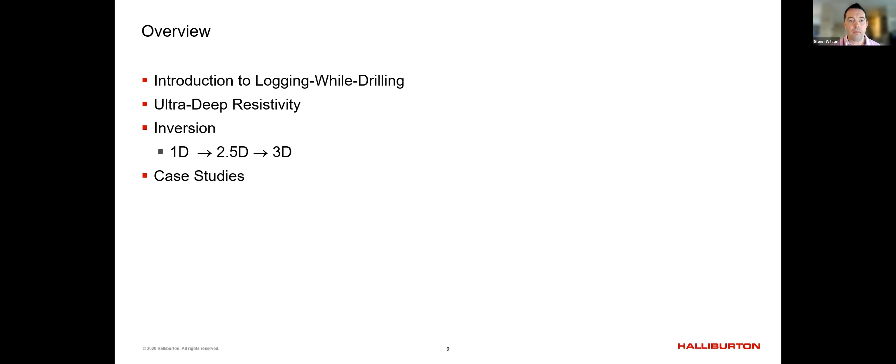So first of all, just a few acknowledgements. Within Halliburton, within the Sperry Drilling organization, for permission and support of this as a product and a technology, and to our colleagues from computational geoscience, and also to our partners, the operators and their partners, for permission to publish the case studies as well.

So a little bit about logging while drilling, just to put it in context for everybody. Logging while drilling is where, as it sounds, we're actually performing formation evaluation measurements while we're in the process of drilling a well. This cartoon here is trying to show a fully laden bottom hole assembly, or BHA. But all these tools are interchangeable, and it depends on the well and the objectives we're trying to achieve. At the very end you've got the bit where you drill. Behind that, you start having the variety of formation evaluation measurements. You'll have gamma ray measurements, not least for depthing, but also being able to look at lithologies.

We have directional sensors, because these wells that we drill are not just vertical wells. They can be deviated to lateral. So understanding where we are in the world is very important, so we have navigation components there. Resistivity is what we're going to talk of today, but that's one measurement we perform during a logging while drilling operation. Our primary reason for doing resistivity measurements is to look at fluid saturations and porosities.

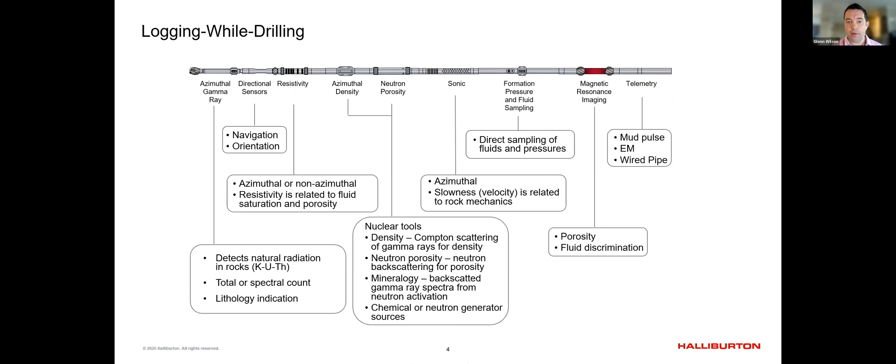But obviously we're drilling a well, and this well is inches, basically inches in diameter. And so obviously we're at significantly sub-seismic resolution. And so there's a real importance here to be able to use these logging while drilling measurements to build upon or improve our reservoir and formation understanding at a sub-seismic scale.

So this is one of the reasons that we start talking of the ultra deep resistivities and the like, or deep to ultra deep, because we're actually able to image away from the wellbore at distances less than what the seismic is giving us in terms of resolution.

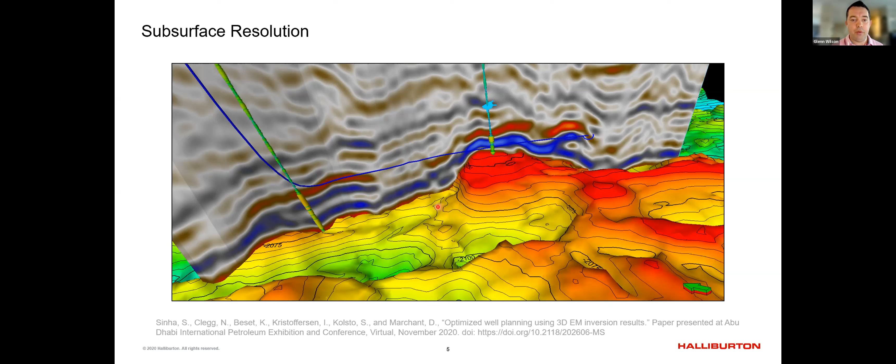If we're picking a 500-foot section of well, and we're drilling at a rate of 120 feet an hour, then obviously that's going to take us 5 hours to drill. However, we need to be making decisions quite quickly as to where this well is going to be placed, because the well path needs to be quite smooth, because ultimately we have to run completions and other tools in this well afterwards.

So we're having to make decisions early on. So in this particular example, we would need to be making decisions in the first 30 minutes as to what we're going to be doing for the next couple of hours. So as you can imagine, time is of the essence. We're not able to just be collecting data, taking it back to surface, waiting a couple of days, weeks, or the like to do some sort of analysis. We're not going to have any impact on the drilling operation if that's the case.

So there's a real big drive here to make sure that all analysis is actually performed in real time. And this is the basis of our geosteering operations that Nigel supports, and we'll speak to more in the case study.

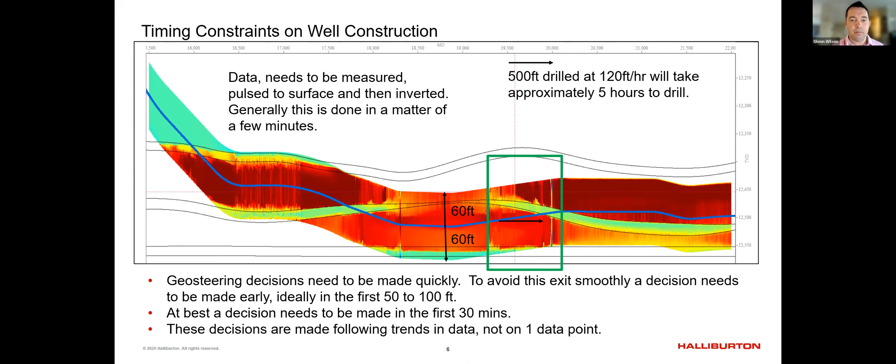So a little bit about how do we measure resistivity. There's a variety of tools to measure resistivity in LWD strings. The original solution is basically a series of coaxial antennas, effectively coils wound around the collar, and what we end up doing is not measuring the absolute field, but looking at relative differences.

So the challenge, however, when drilling in a geosteering operation is that with a coaxial configuration, you don't have azimuthal sensitivity. So whether you're approaching a bed boundary above you or a bed boundary below you, the response is the same. And so it is giving information about resistivity, yes, but it's not giving you information to help influence the geosteering operation. Should you steer back down? Should you steer back up?

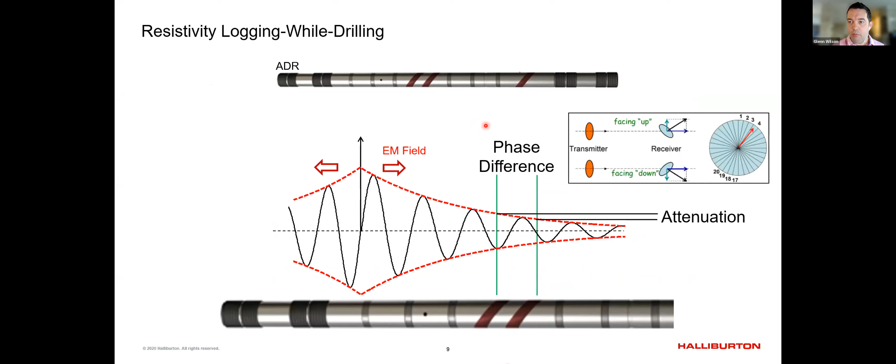And so this led, about 15 years ago or so, to the development of the azimuthal resistivity tools. Here's an example of what we refer to as the azimuthal deep resistivity tool, or ADR. What we have done is the receiver coils are now tilted. And so, as you can imagine, as the tool begins to rotate, we're able to have azimuthal sensitivity. The tool has more sensitivity to one side than it does to the other. Otherwise we're recording the same amplitude and phase difference between those receivers.

And so the benefit of the ADR is that, as we approach a bed boundary, we're now able to determine on what side the boundary is: is the boundary above us, is the boundary below us. And this has been used successfully for years now to influence geosteering operations.

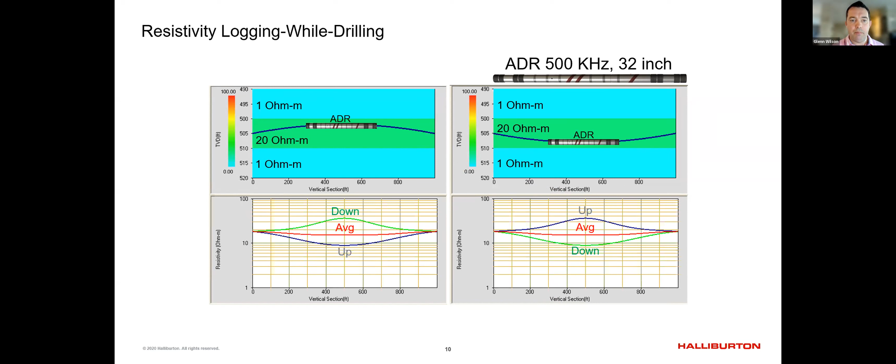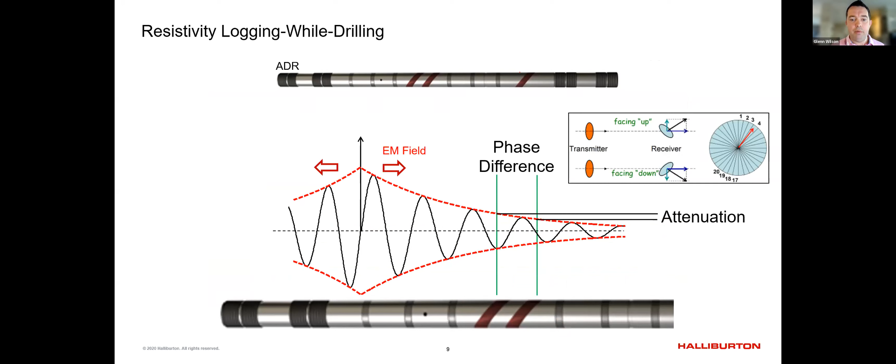Again, the depth of investigation is determined by the spacings of the transmitters and the receivers. For the shorter spacings and high frequencies commonly used, the depth of investigation can be on the order of tens of feet. However, when we want to look further in some geosteering operations, we have to space out the transmitters and receivers and change the frequencies. And so that is what we've also progressed to, what we call ultradeep resistivity.

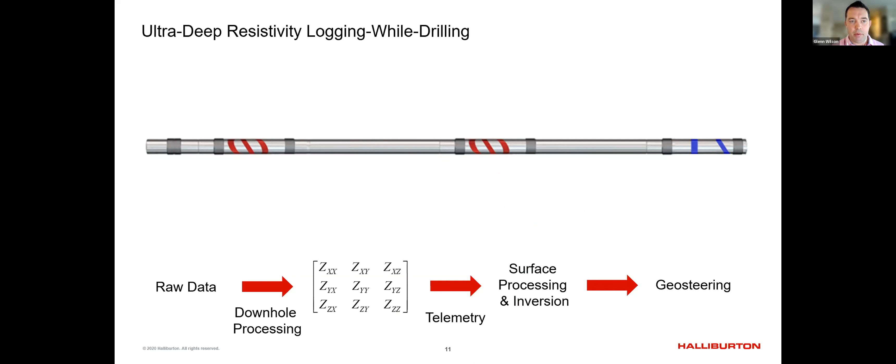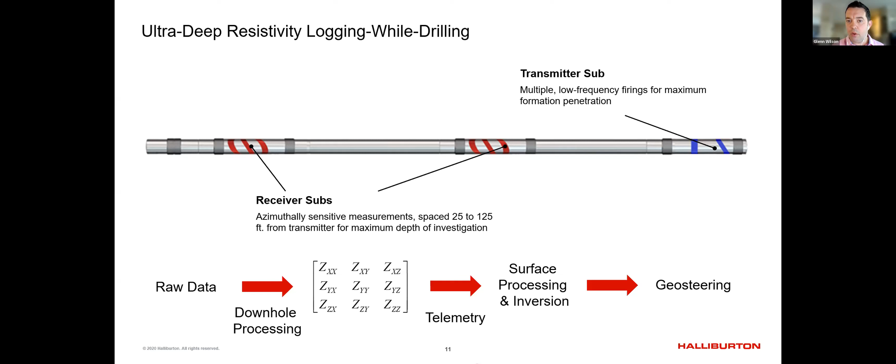This is where we begin with a transmitter sub, and by sub we mean it's a dedicated tool length. Whereas previously, the ADR and the EWR, those tools are all on the same drill collar. With ultra deep resistivity, the transmitters are on one collar, and we put receivers on different collars. So now we can space them out with, for example, other logging while drilling tools, or other spacers. So now we have flexibility as to the distance from which we want to image.

Now in terms of processing, we're putting current through one, we're recording voltages on the receivers, we're taking that raw data and doing downhole processing to calculate impedances, and then we're telemetering those to surface. We're doing additional surface processing. This is where we do our inversion, and then those answer products are fed into the geosteering operation.

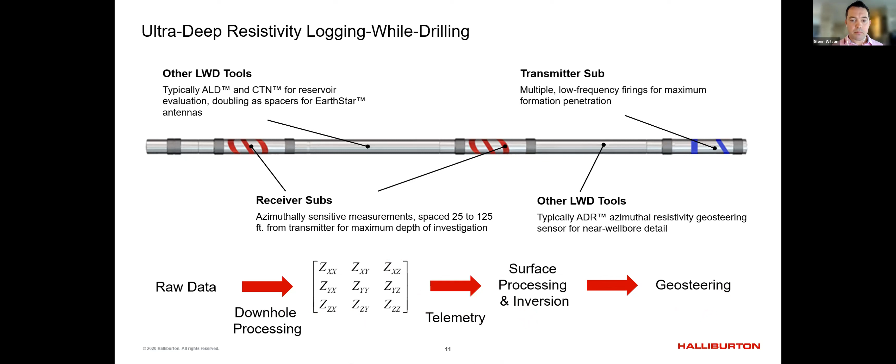So we're going to spend more time talking about the inversion side of this, and how this is used in practice. To this community, it shouldn't be a surprise, but we'll discuss the progress of inversion dimensionality from 1D all the way up to full 3D. In 1D inversions, we're assuming a layered Earth model, where the formation only varies in one direction. In these cases, we assume that it varies above and below the wellbore.

Because we're dealing with controlled sources, we have the ability to go to a 2.5D inversion, so a 3D source and a 2D geology with infinite strike. This can be along the well trajectory, or it can be across the well trajectory. But then you've got the full 3D, which gives you the maximum ability to have changes in all directions and capture the most geological complexity.

So we're going to talk about this progression, but in the art of electromagnetic inversion, there have always been discussions around progressing. This has been the same for airborne electromagnetics. It's been the same even for MT, progressing from 1D all the way to 3D.

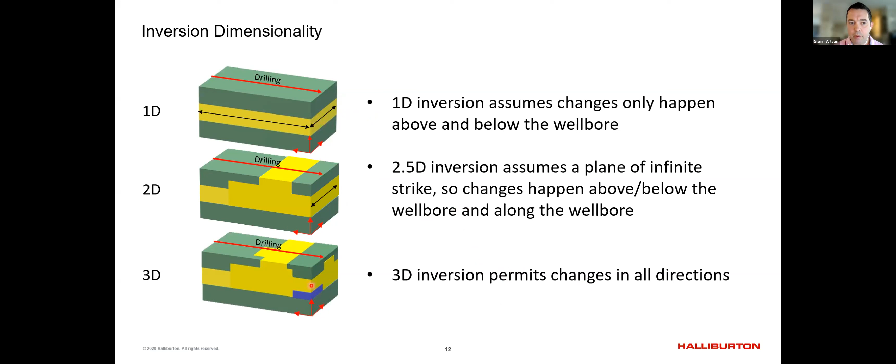And so here are examples of what the 1D inversion would look like. This is actually a pre-drill model showing you the multiple layers included in it. We can calculate all of those responses, what the tool is expected to measure, and then we can go about inverting those. Again, in the context of 1D inversion, there are any number of ways to frame this.

Over-parameterized, you can have it deterministic, you can have it stochastic. There are pros and cons. There's an abundance of literature describing these sorts of solutions. This is one example that we, as Halliburton, published back in 2018, kind of just for the ultra-deep resistivity.

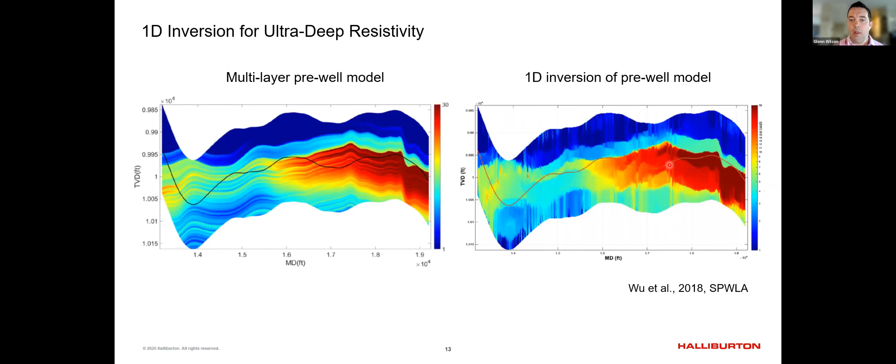Again, just kind of showing that you have a much finer resolution in your model, but then of course you're solving this for a smaller number of layers. But it gives you an idea of the sort of structure that you're trying to recover. And these 1D inversions have actually been validated, and this is again from the same publication with Mark Wu that was presented at the SPWLA back in 2018, and this is a really interesting case study.

So this gave us confidence that the tool we've developed was able to have sensitivity in this case out to over 200 feet from the wellbore, because the two inversions were able to resolve the same feature at the same true depths.

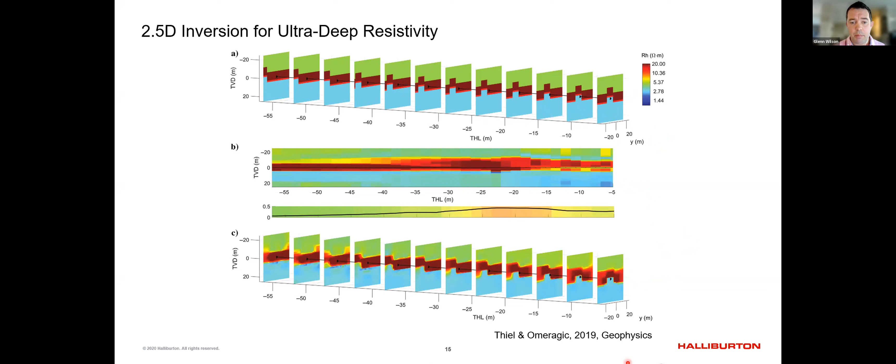So this is an example of some 2.5D inversions which have been published. The idea here is that with 2.5D, you're dealing with controlled sources. You're assuming that the formation has infinite strike in one direction, and then you're letting the other two dimensions vary. 2.5D has been published for controlled source methods for the better part of 25 years now, so this should be well known to this particular community. But obviously, we want to try and progress to the full 3D.

Normally for these sorts of grids we're going to iterative solvers, so you don't gain a lot from source to source. But it's that usual challenge, right? The discretization, the fact that we're dealing with very fine cells around the wellbore, going to very coarse cells away from it, implies that we're dealing with huge numbers of cells in the model. And so it becomes intractable to expect we can use one grid for both modeling and inversion.

Within the community, this has been identified for quite a while. Going back, for example, Commer and Newman did this sort of decoupling for marine controlled source EM basically 15 years ago. It's also been applied to airborne electromagnetics. You're able to take your global mesh, and for a given transmitter position, you define a local mesh, and then you can superimpose those. And if you've got multiple sources, each one of those can have its own local mesh.

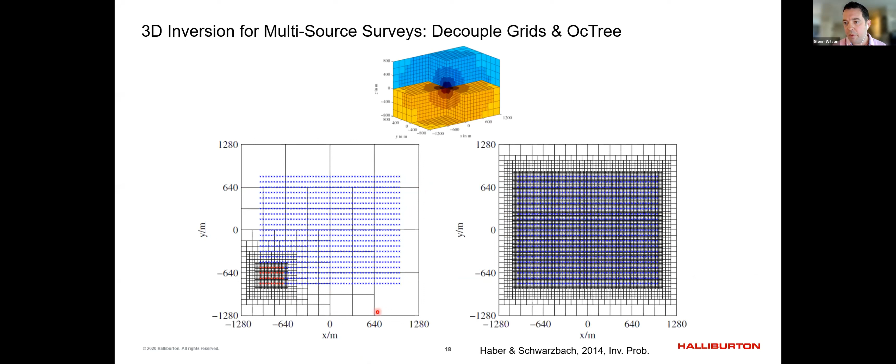But then this is basically running around the entire global grid. And so we're able to leverage this concept, particularly for logging while drilling. This is what really enables us to progress to a real-time type of solution, because we're collapsing the number of unknowns in that model down significantly.

Another point here as well is, as we go about doing inversion on LWD, we're continually collecting data. During a standard inversion, you may be trying to do inversions with all the data which you've collected. In logging while drilling, once we've drilled past something and it's beyond the sensitivity of where the drill bit is, there's not a lot of sense in maintaining that data in the inversion.

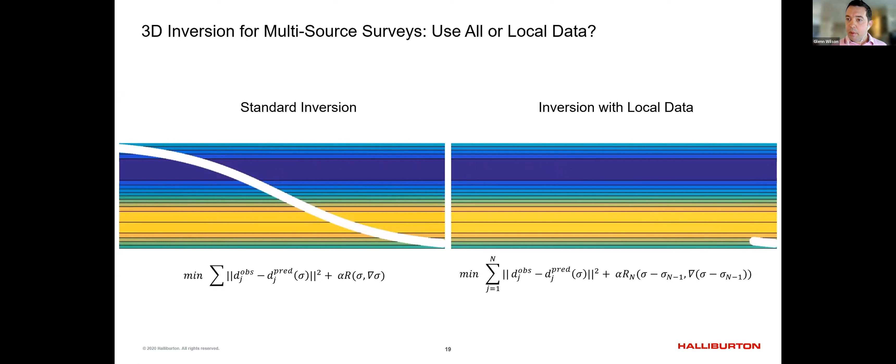So as a result, we end up doing inversion with basically local data. This has been practiced for drilling or wireline applications, called a moving window. The idea is that you've got a set of data which you continually move along the wellbore. So we end up practicing this, and it limits the amount of data we have to invert for.

So again, looking at an LWD example, the grid on the left here is what the global grid would be, and the grid on the right is what we would need to be solving for a given transmitter-receiver pair. The point being that as we progress the drilling operation, that grid is able to dynamically change and then map itself back into the global grid.

But this is where we come to the point. Often over literally the last 15 plus years, we end up with this challenge. First of all, it was: 3D inversion is not possible, it takes too much time. Now we rub up against: real-time 3D inversion is impossible. And so this is really to dismiss that.

If we compare solutions, a 1D model can have in the order of about 30,000 degrees of freedom. A 2.5D inversion, given that you're discretizing in 2 dimensions plus the spatial frequency domain, can typically end up with over 100,000 degrees of freedom. With the OcTree mesh and the ability to limit the volume of sensitivity, we're able to get this down to the order of 30 to 50,000 cells per model. This means we're able to solve this in literally seconds, compared to standard grids with huge numbers of cells taking hours to days.

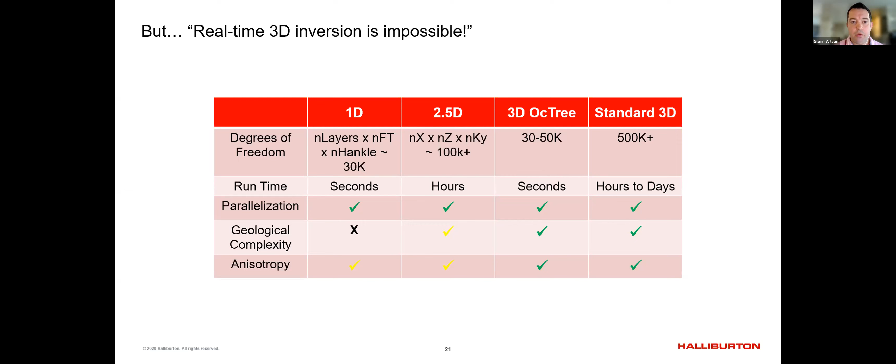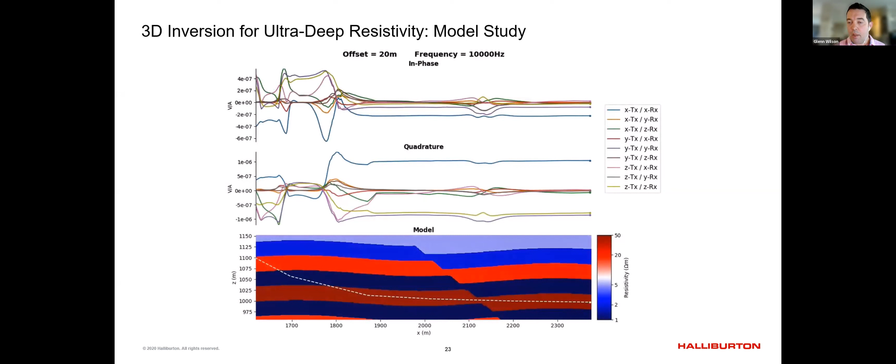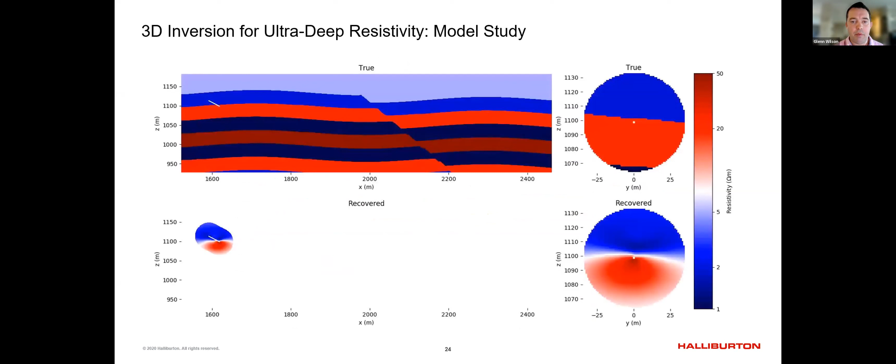So in terms of inversion, what you're going to see here is the top is the actual true model. How do we compare to reality? The bottom is what we're going to see with that inversion of that local data as the BHA moves through the formation. And then the images on the right here are going to be basically gun barrel views down the well. And so you're able to see the formation azimuth be captured as well.

And so as I play this, it's basically simulating that logging while drilling operation, in that you're able to see around and slightly ahead of the BHA. And so obviously as shown here, it's not just capturing the formation in the plane of the well trajectory, but we're actually capturing the azimuths around the wellbore very well.

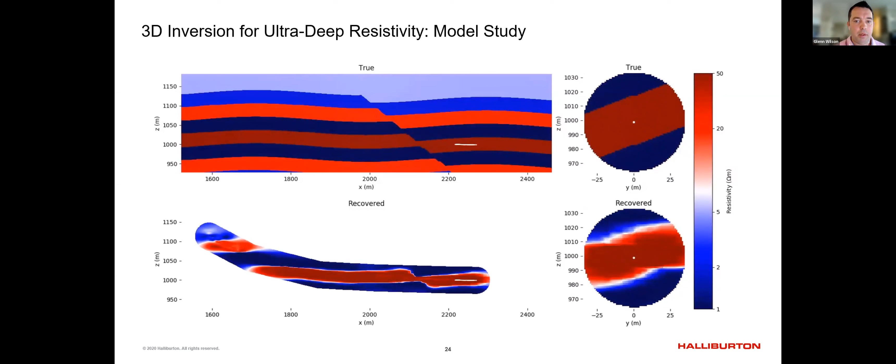So it was a couple of years ago that we actually introduced this as a product, and it's the EarthStar 3D inversion. At the time it was, and still is, the only real-time 3D inversion available for logging while drilling. In that time, we've actually gone through and done a large number of jobs with this, and really proved out the technology.

And so I think now it's appropriate for me to hand it across to Nigel so he can step through the case studies and talk more around this with you. Thank you, Glenn. I will just take over the screen sharing. Okay, and it's this one.

Right, so I'm going to look at a few examples, and this is just three of the case studies to show you how you might use this sort of tool. Glenn's covered that LWD tools are used during the drilling operation for the recovery of hydrocarbons. But what we're looking at when we do that sort of operation is putting the well path in the best zone possible. Quite simply, we want to be in the most productive zone where we can drain the hydrocarbons.

So we may have placed wells in that target reservoir, produced from some of them and injected from others, and then a new well is planned to target oil that is yet to be removed. But in drilling that well with injection water in the same reservoir, there is always the possibility that we won't just encounter hydrocarbon, we might also encounter some of that injection water. And if we drill through or near zones that have injection water and draw that into the wellbore, then we're producing water and not hydrocarbons, which is not the target of this sort of operation.

So we'll look at a very simple example. I've got a little diagram here in the top corner. Here is a well that has already been drilled into the field, and they've been pumping water into the field to push the hydrocarbon towards their production wells. And then they plan to drill a new production well. See if I can get the pointer here. So they're going to drill a new production well, and it looks like it's going to be in a very good zone of hydrocarbons.

Now, if we look at inversions, a lot of the inversions for these ultra-deep tools focused on 1D inversions. And as Glenn showed at the start, essentially all they consider is that any change in our formation or fluid resistivity will only occur above or below the wellbore. So if I place my well in this nice oil zone here, all I will see is a zone above and a zone below the well.

Now I might drill this well, pat myself on the back for drilling a perfect well in 100% hydrocarbons, and then walk away. And then when the next team come in to start producing from this field, they can draw the fluids into the well, and they potentially can start producing water. And the big question then would be why?

So we need to treat these situations as not just a problem of what's happening above and below me, but what's happening to the sides of me. Because obviously fluid doesn't just move up and down. It moves from pressure zone to pressure zone.

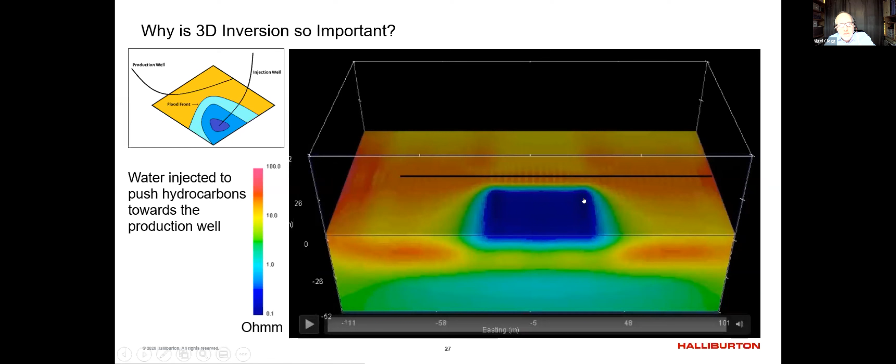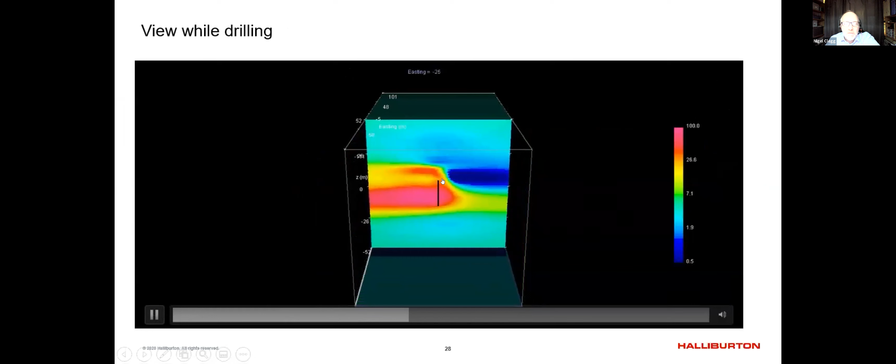So obviously this is a synthetic example. And you can then look at it in different ways. So you can imagine if we're drilling along and suddenly we see that water to the side, we have the potential to steer away from it. We have the potential to be more sophisticated in how we drain this reservoir. But overall, we have a much, much better understanding of what is happening. We're not just treating the world as an up and down problem. We're thinking about it in 3 dimensions.

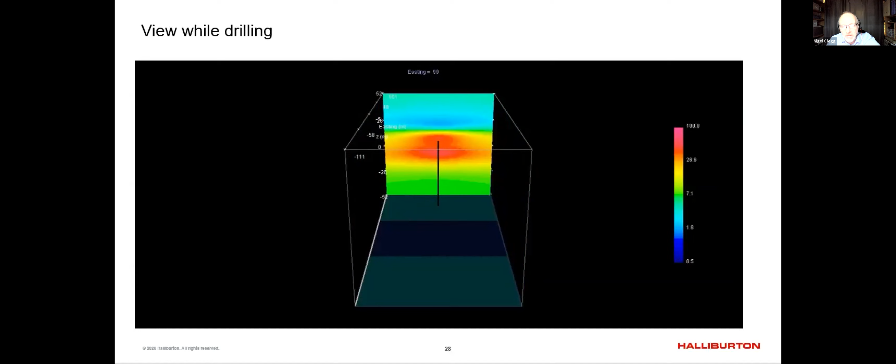Now that's all well and good because that's synthetic data. But we got asked to test this practice by looking at a situation where we had very complex water in a very mature field. So this is an excerpt from a paper published at ADIPEC last year. They had this problem, what they referred to as water slumping.

So they knew they had water zones that had infiltrated upper parts of the reservoir. They would drill a new well in the target zone, and then that water would start to get drawn into the well as soon as they started producing, or maybe a couple of months after producing. They didn't understand what was causing it, what the mechanisms were. Now, from a 1D perspective alone, you can actually map this water zone, and we saw very clearly that the water zone started to get much closer to the wellbore. So even by looking at it in 1D, we could understand that something was occurring.

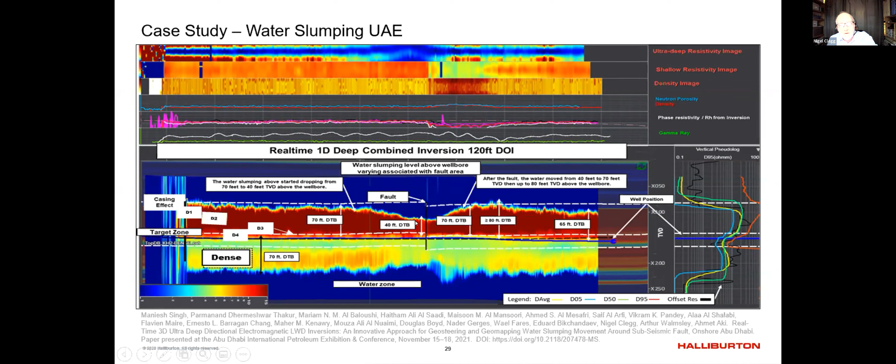So if this had only occurred just to one side of me, and my fault had not crossed the well path, I could still have assessed that that is where the danger zone is in terms of the water production. So understanding the world in 3 dimensions means when we place these wells, or even after a well has been finished, when we then try and exploit the wells and draw out the hydrocarbons, that we can do it in a much more sophisticated way.

Because as soon as you start pulling water into the reservoir, it becomes very expensive. There are mechanisms for removing water when you pull it to surface, but that costs a lot of money. And in some cases, you end up with situations where the water causes what's called a water lock. And essentially that means that it will stop the hydrocarbons from being pulled into the reservoir, and you no longer have any successful production.

So the advent of these tools, they're beneficial in two ways. One, they can see all the way around the wellbore, and in fact, in 3 dimensions in every direction. But secondly, out to a distance that we can do something about. Now, a lot of tools can measure sort of images around the wellbore, but they're very close to the wellbore. Some of them are a matter of inches, some of them are a matter of a few feet, but they're not seeing problems very far away.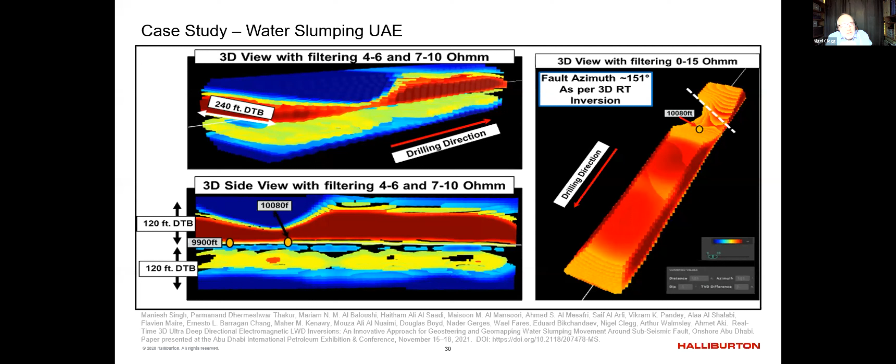So the other option we can then look at as well, as I said, lithology is also significant when we're looking at these sorts of wells. And we looked at some examples where we had turbidite sands. Now, I'm not sure how many of you are geologists, so I'll do a very brief overview of turbidites.

Essentially, at the edges of the continents, etc., where we have big slopes, you get a big collapse and all the material gets thrown down the slope and flows as a big long flow. As it flows, the sands separate out from the fine clay material. So you end up with a sorting of all of your mixed sediments to create huge sand bodies. Those huge sand bodies are often very clean, and that allows you to then have a very good reservoir potential.

But when we're looking at that sort of environment, if you think about it, if we're on the edge of a continental slope and we're looking at slope collapses, that can happen all around. So you don't just end up with a nice layer cake situation. You end up with channels that then get cut by later erosion events and then get more material deposited on them. So you end up with a very three-dimensional situation. It's not a simple layer cake scenario.

And if we look at a standard well, so you can imagine this is a standard well path here. Put my pointer back on. So this is my well drilling along. This is my 1D inversion where I'm only looking at resistivity changes above and below. I'm in my nice target massive sand, and then I suddenly drill out and I exit into shale.

At best, maybe I will see a thinning of this unit as I hit the edge, but essentially I've drilled into the overlying or surrounding shale units, which are not productive. So that exit is expensive. Now, it's expensive in two ways. One, I'm no longer in a hydrocarbon zone, so I can't produce it. And two, it then opens the question of, do we go looking for the sand?

Is it that the sand has migrated to one side or the other, the channel has migrated, or has it truly exited? Has it truly pinched out? And if we could look at this from the top, you can imagine the simple scenario. We have a channel and we have literally drilled out of the side of the channel. And a 1D inversion would not allow me to know that situation. I've just exited out of the side. Here, even if I had exited out of the side, I could see that the sand was still there.

Or if I'm really quick and the angles of these features are conducive to drilling, I could actually change my well path during drilling to try and remain within that target zone. Now, this is difficult, and the reason it's difficult is because when we're drilling, we can only change our well path by a few degrees every 100 feet. You can't do anything more severe than that, otherwise you can't get your completion string down.

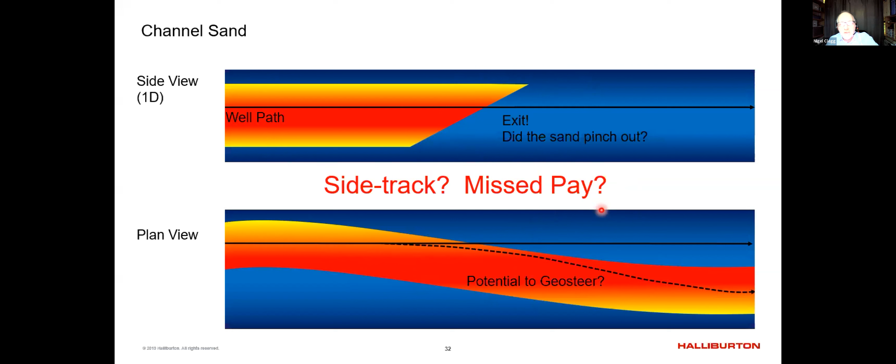So it might be that the angle of this change is too much for me to steer by, but we have techniques such as pulling back and sidetracking, which allows us to open another well within the existing well structure that would allow us to target the sand. But if I only looked at it as an up and down problem, I would have no idea where the sand was or even if it was present. In fact, I could start drilling an exploratory well that went off in the other direction. And obviously that would be very, very expensive.

So again, when we're looking at this sort of scenario, the first option we took is to do a sort of synthetic result to see if we could do an inversion that would clearly pick those boundaries. So here's that side view, and here's that plan view. And this is my sort of synthetic well where I've exited out the side. And I'll just show you a sort of video of the kind of thing that we'd be looking at.

Here's my reservoir. As I'm drilling along, my well path is placed nicely in the middle. And I'm drilling my well, and you can see very quickly this boundary, I'm starting to get closer and closer to this boundary at the side. So if I ignore this and only look above and below, this boundary would come in and eventually surprise me. But because I'm looking at 3D inversion, finally I have a tool that allows me to assess where that boundary

has gone. And even in the worst case where I've exited out of the reservoir because I didn't see it in time or we couldn't steer quickly enough, we know where that reservoir is. We know that there is more reservoir. We know it is very close, and we can plan to intercept it.

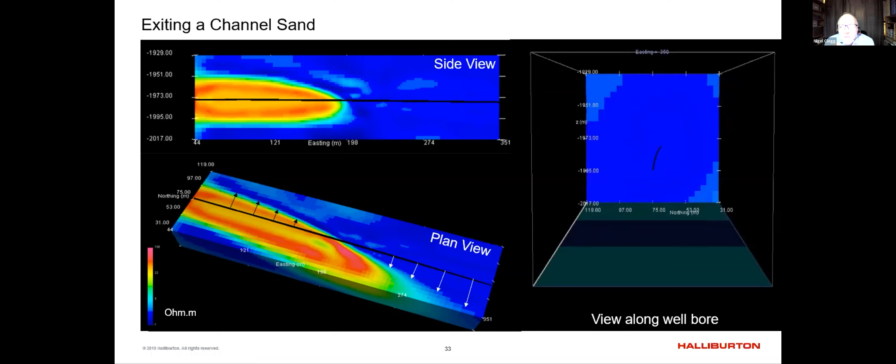Now, prior to looking at 3D inversion, at best, we might be able to understand some of that potential for where the channel has gone from seismic data, but a lot of the structures that we're looking at and a lot of the detail is below the resolution of seismic. We're not able to necessarily see that much detail. The advent of ultra-deep resistivity tools and then 1D inversion allowed us to make that sophisticated change above and below. And now with 3D inversion, it allows us potentially to understand what's happening to the sides.

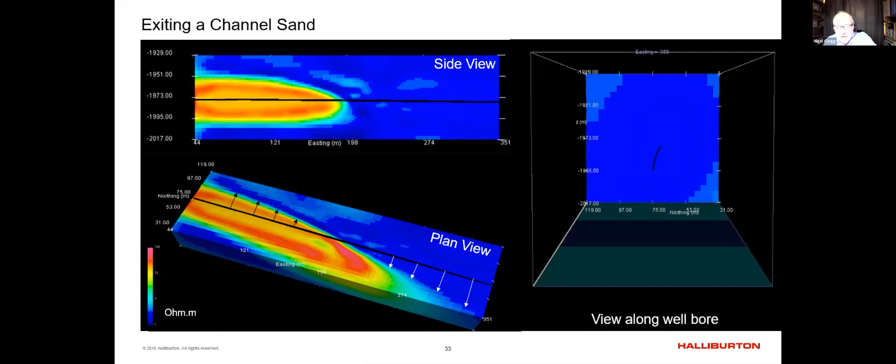And that's a big difference when you consider how complex a lot of these reservoirs are. There's some really potentially complex reservoirs out there that are very good, but you don't want to be drilling multiple wells to try and actually hit that sand or remain within the sand. The less wells you can do, the cheaper it is. You know, each well that you drill is extremely expensive.

And interestingly, I'd looked at this well quite a lot, and we understood for definite that the oil water contact was going to be very unusual. It was clear from the other offset wells that have been drilled. But I didn't really until recently think about why is it so unusual. You know, these are good sands. They're quite porous. There is no way my oil water contact should change that much.

So beyond what we've talked about, or we'll talk about a lot today, we can now invert for something called anisotropy as well as the resistivity. And that's the variance in resistivity, the vertical resistivity and the horizontal resistivity. And we haven't got that material released yet, but it will be released later this year.

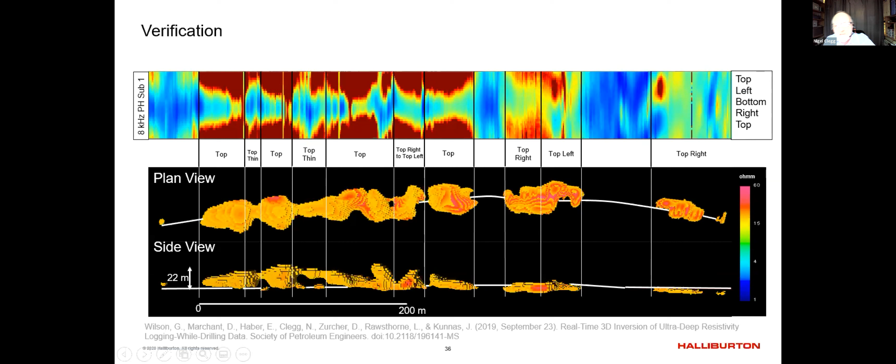And it gave us really high confidence that even when the geology is complex, the inversion is giving us a good representation. And knowing this is how the sand is distributed allows us to understand the reservoir more and potentially exploit it in a more sophisticated manner.

And then here's a big picture of the whole reservoir. So each of these we did a 3-dimensional inversion on. This is those big scale swoops that I showed you at the start, which is caused by erosion. So this is actually a second event. These were deposited as a single depositional event, and then later other events have caused erosion to create channels. You can probably see a second one is coming through here, and there are more.

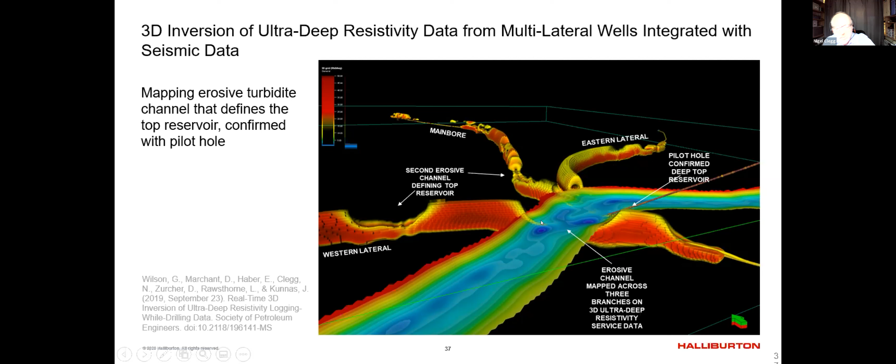But it allows us to very quickly build up, by combining that 3D EM data with our seismic data, a better understanding of how these sands are positioned and what is causing the complex reservoir morphology that we're looking at.

And just to show you an example, this isn't the same well, but this is a very similar one to show you how you can look at the data. This is just that 3-dimensional data. This is actually real-time data that we brought in, because after running those original wells, we developed this technology to be able to run it real-time.

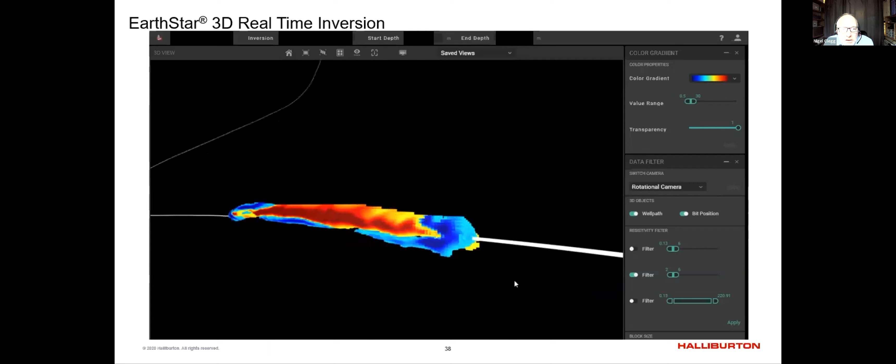So obviously the strength in any data set is being able to investigate it. It's very difficult when I do a presentation like this and we show static images, because you can't really grasp the full investigative powers of having a 3-dimensional environment. But you can filter out the low resistivities, you can focus in, you can slice the data in different ways. And during a job, we're able to actually look at this structure.

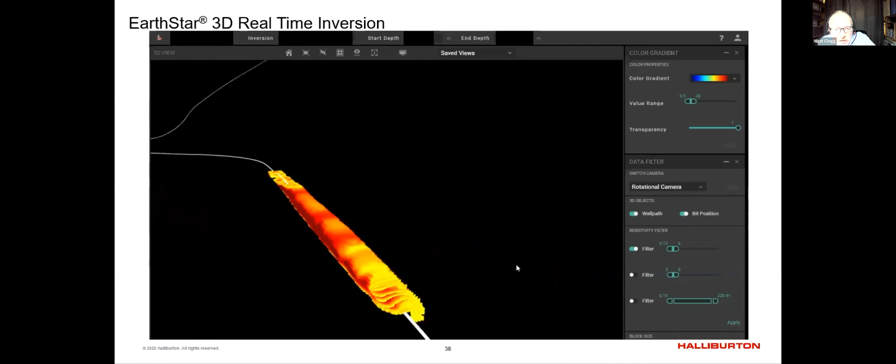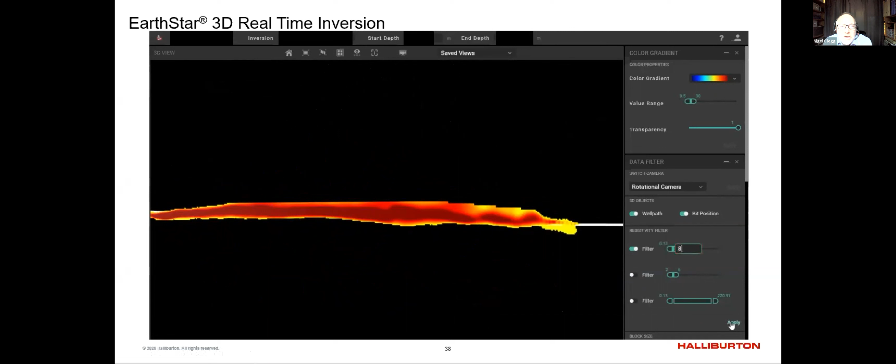So here we drilled straight across the massive turbidite, and we see a sequence of sands. Each of these dark red blobs is a separate sand unit created by a separate depositional event. But by looking at the data in detail during a job, we're able to actually build up that picture of what is happening and then maybe make better steering decisions.

Interestingly, in this well, it was a real-time deployment of the data. We had no intention to steer using this data, but we got really nice images of each of these individual sand units, these dark red zones, and actually found that some of them are isolated from the others. So they actually represent isolated sand packages and not a single massive sand package.

And when you look even closer at the data, we're then able to pick very thin shale units that are lining these sands, and that's what's isolating them from each other. So whilst we were drilling across at the same TVD, we went from oil to gas and back to oil, which should be impossible if the sands are connected, but it allowed us to understand, even with a test of the real time,

how understanding the three-dimensional structures and being able to resolve clearly the geology, because obviously a 1D inversion here may struggle in terms of the 3D structures. It might show that flaring I discussed before. We can actually understand very quickly what's happening. And again, that section was blanked off. They didn't want to produce gas. We can save a lot of potential time and effort in the production sequence afterwards, after the well has been finished.

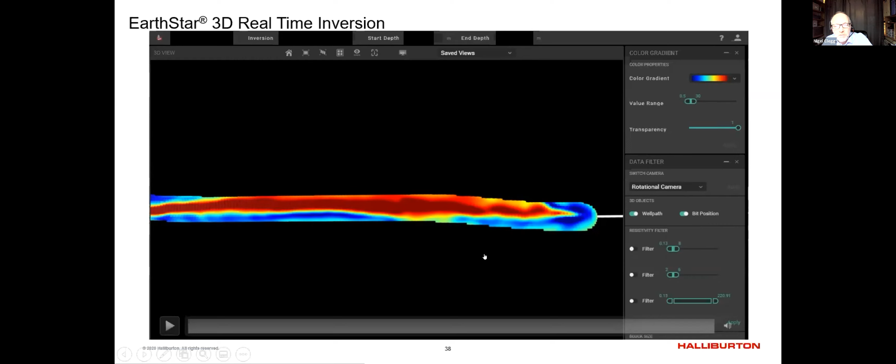Now, the wells I've looked at here are horizontal wells, the reservoir sections. But in a lot of wells, we also conduct what's called landing operations. This is where you're coming down and your well is angling down to hit the target reservoir. And as you approach it, you flatten off to land at the perfect point in the reservoir, so that when you drill your horizontal section, like we just showed, you're in a great position to stay within that sand and maintain a good position.

So this was another paper. This was presented at OTC, I think, which was a well drilled in Brazil. They're intending to land. They expected from the seismic the reservoir to have quite a lot of variability. So these three lines represent the potential variability in the seismic that they were expecting.

You know, if the reservoir top was much higher than expected, and we carried on with the normal well plan, we'd have landed too low, and our well would have been in a poor position for the horizontal section. If we'd gone for the bottom case and our well had landed above it, we'd obviously be landing above the reservoir and totally missing it. So we had three different cases.

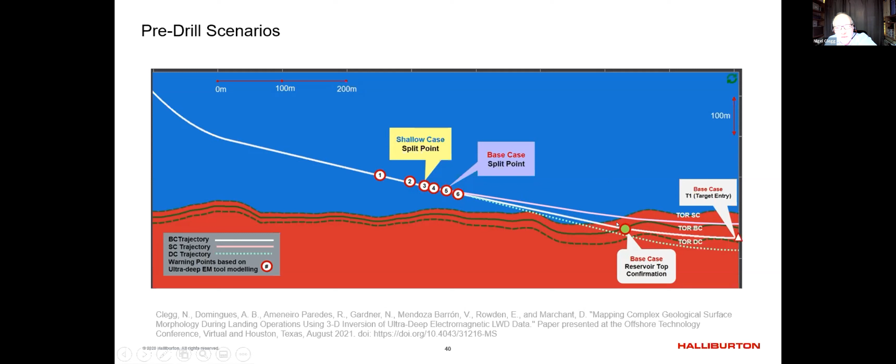So the idea here was to use a one-dimensional inversion, quite simply, to pick those boundaries as we land, and then optimize where we're going to land out. So we can change our well angle to make sure when we hit our target zone right at the end here, we're in the perfect position.

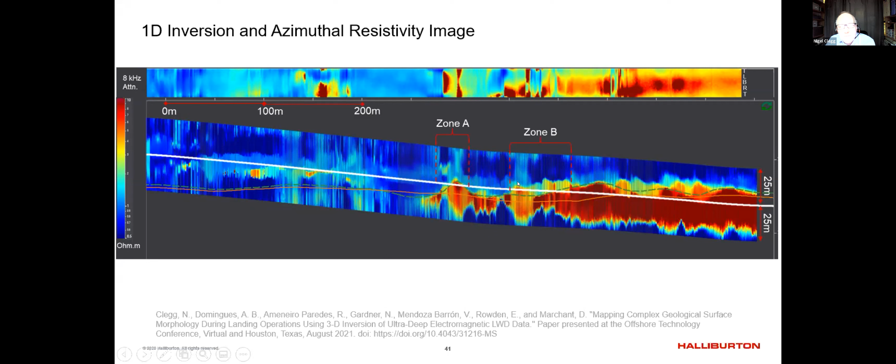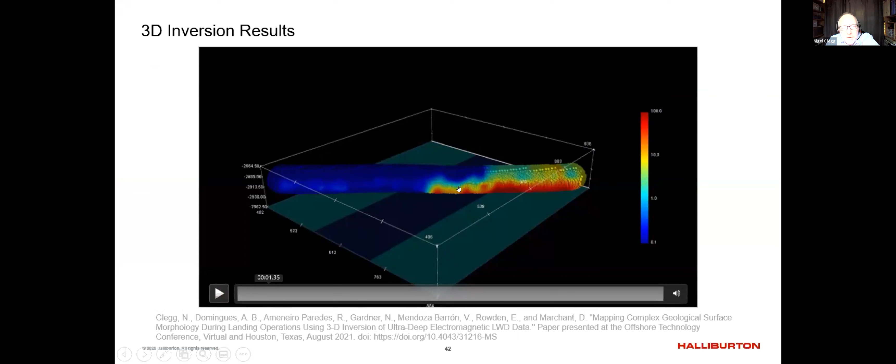So another little video here. So this is that same situation, but this is all of my data. So the low resistivity in blue, and then this is the section where we land out. If I gradually filter away that low resistivity, you see we hit that main point, and then we drill into what appears to be the main reservoir.

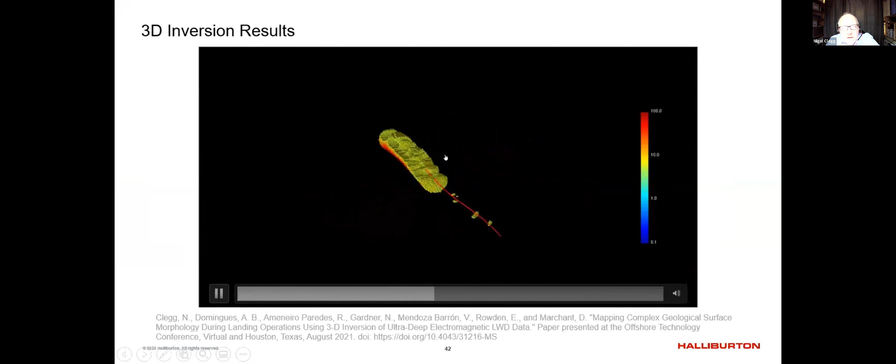But as you start to cycle it round, you can see we're not actually in the reservoir itself. We're pretty much drilling alongside what is a subterranean cliff face. So all of the resistivity, all of the target reservoir, is sat to the side of me. So there's no wonder I'm not seeing much sand in my cuttings. I'm not in the reservoir, I'm still in that low resistivity zone. And looking at that one-dimensional inversion, it's really difficult to understand where I am. But as soon as you see this, you can see, oh, well, there it is, it's right next to me.

I could have planned my landing operation much more carefully and with much more sophistication if I'd understood this complex reservoir morphology. And to be honest, this is expected. I mean, look at the shape of this surface that we have drilled through. This is obviously a series of depositional and erosion events. That can happen along the well path. It also means it can happen to the sides of the well path.

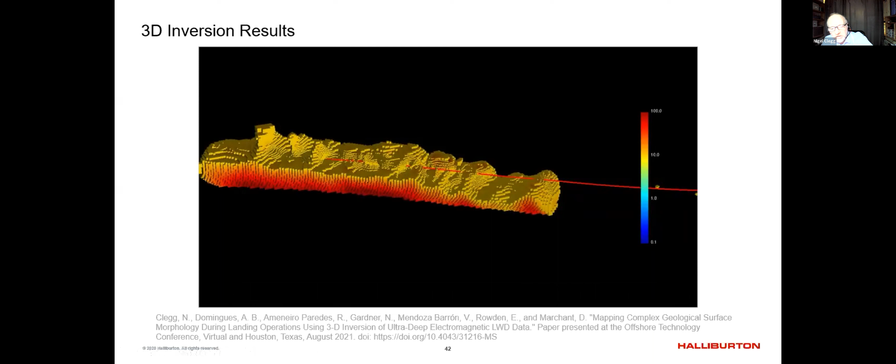So if we use 3D inversion, rather than just having a sort of session where we're scratching our heads to try and understand why the inversion tells me that I'm in the reservoir but other data doesn't, I can actually build up a much more sophisticated picture of what's going on.

So I'll do the conclusions before we get to questions and things. You need to be able to do these things real time. Now, all of the discussions that we've had here, these wells are drilling constantly. As you're drilling, you've got to make those decisions to change your well path as you drill. We cannot wait. Some things you can understand after a well has finished. You can drill a well and then look at the data after it's finished, but you then have no ability to change the position of that well.

And even if we're going to make a decision after the well is finished to affect how the completion is run, that completion is run literally a matter of hours or a couple of days after your well is finished. You don't have a lot of time. So this is why Glenn's point about having a 3D inversion that you can have real time for the data, and maybe within a matter of a few hours if you're going to do memory data for the whole well. You need to know what's happening straight away. You can't wait a few weeks later and then say, I told you so.

We need to make those decisions as we go. And at the speed that they drill these, it has to be pretty much real time. And by real time, we're talking about a matter of a few minutes after it has been transmitted from subsurface. We need to have that result on a screen in front of the geologists. These tools and the way we use it can be used for landing, steering wells, stopping if we're going to see a hazard, or mapping formations to understand them better.